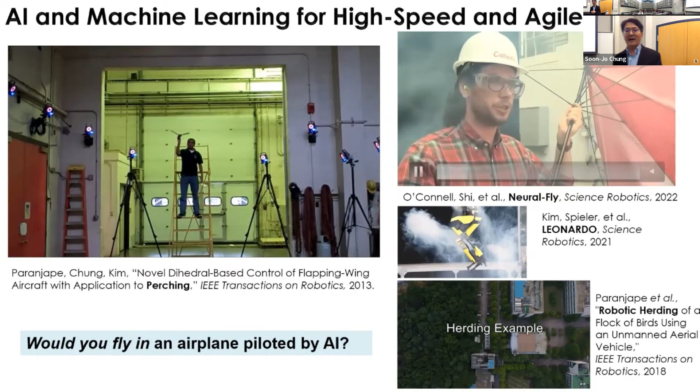So what kind of extreme environments am I thinking about? My former student, Guanya Shi, will soon join RI, the Robotics Institute, as faculty. This is Guanya's work with a micro-drone, and a Reuters TV video. Michael is having so much difficulty holding the umbrella—that's a mild gale type of wind, like 44 kilometers per hour. And we have a drone that can actually fight that kind of wind.

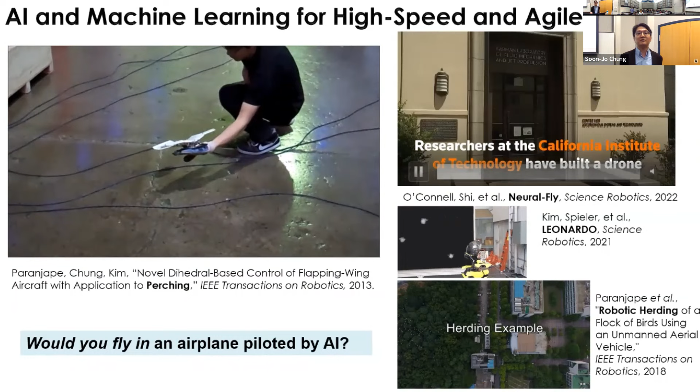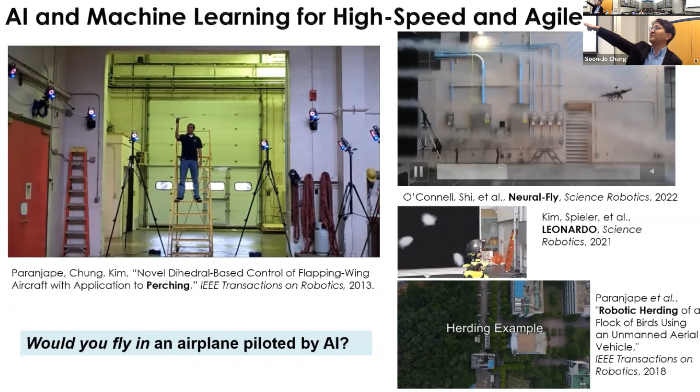It's called Neural-Fly, a machine learning based flight controller. Next to it, we demonstrated something with no machine learning: a perching maneuver using a bird-like robot. It's bird-like because you can move the left and right wing almost like flapping independently, so you can control the orientation of it, and then do pinpoint guidance. You can actually land and perch that glider robot on a human hand.

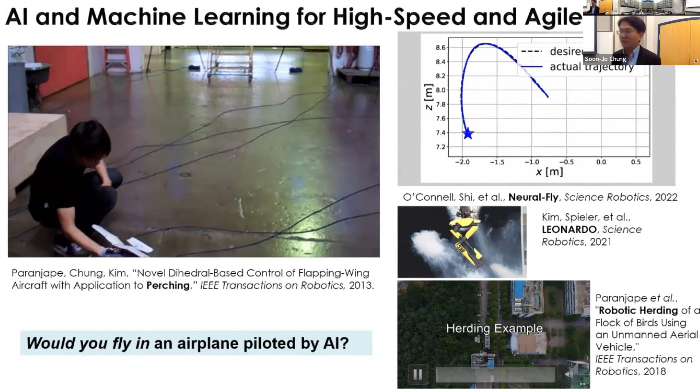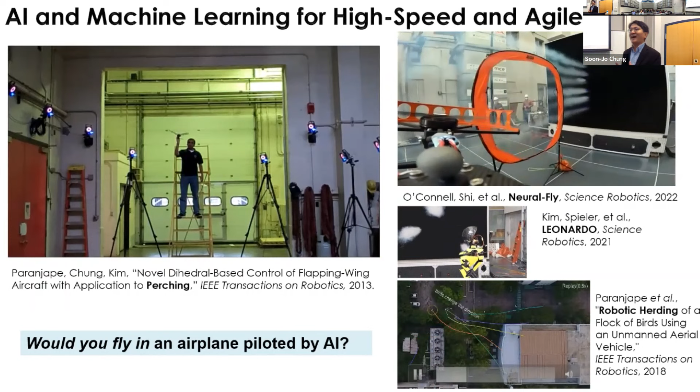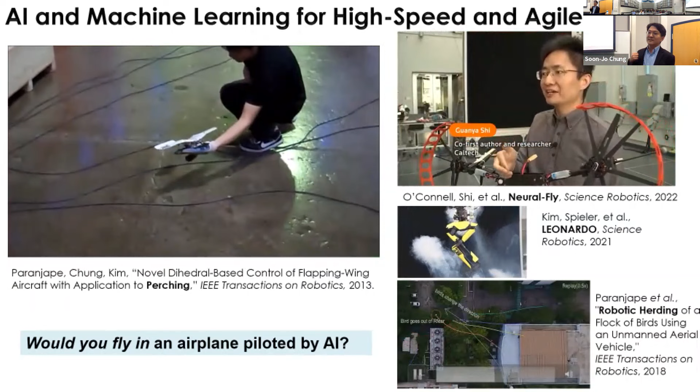Another example shown here is another video based on my prior work on swarm dynamics. I worked on swarm robots and swarm spacecraft, studying the flocking dynamics of birds and reverse-engineering that. This is the first ever demonstration of herding a live flock of live birds using a herding algorithm. These are examples of fast speed robots.

And if that's not fast enough, I'm going to mention another project for the Neural Rendezvous. We actually just submitted a paper, and I'm not going to go into detail, but essentially we developed a machine learning based approximation of some real-time model predictive control.

That way you have very resource-limited hardware on the spacecraft, because you really need radiation hardening for your spacecraft, so you probably don't have very fast computation.

So this is one example of using a neural network-based or machine learning-based method, essentially approximating the real-time computation needed for optimization using neural network approximation. Of course, that's much easier said than done, so you have to guarantee the stability and so on.

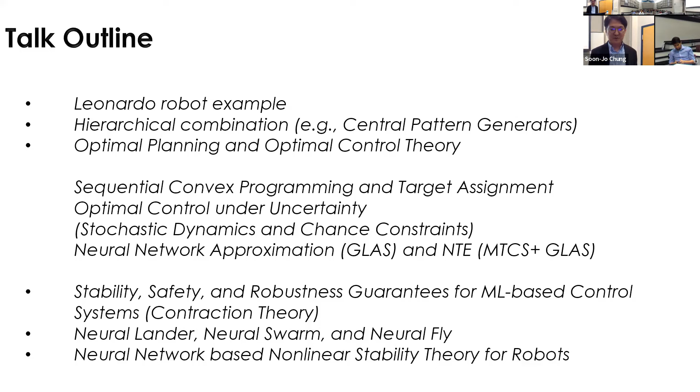So this is the main message for safety critical systems. I talked about high-speed spacecraft and drones dealing with huge uncertainty like unknown wind, because it's kind of independent of your state.

You have to deal with it.

So we have some approach of doing that. Now, the Leonardo robot - I have not used any machine learning here, but this was the first robot that bridged the gap between aerial locomotion, basically flying, and a walking bipedal robot. The idea is simple: you add propellers so they can actually stabilize the walking motion, and so you can occasionally fly.

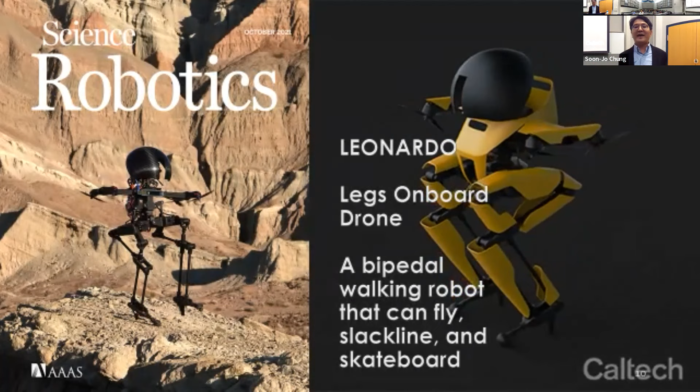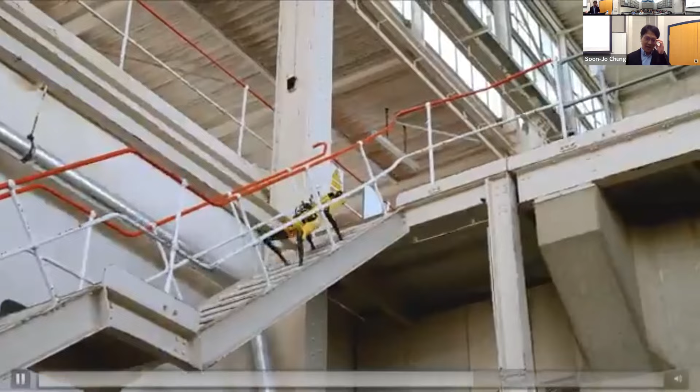The motivation for this is that I hear a lot about quadrupeds, and this is very impressive - they can go over loose rubbling terrain that bipedal robots cannot traverse. It has native obstacle avoidance, quadrupeds can do that easily, and can back up again. But why bother?

Look at our Leonardo robot. We start walking, find the stair, and I want to traverse that stair, and then boom, just fly over your obstacle. So that's the idea. Take a look at the certain posture, orientation of the leg and the whole body - you have to somehow synchronize these leg joints with the propellers. We have 4 propellers to stabilize the motion, and it also allows the Leo robot to fly.

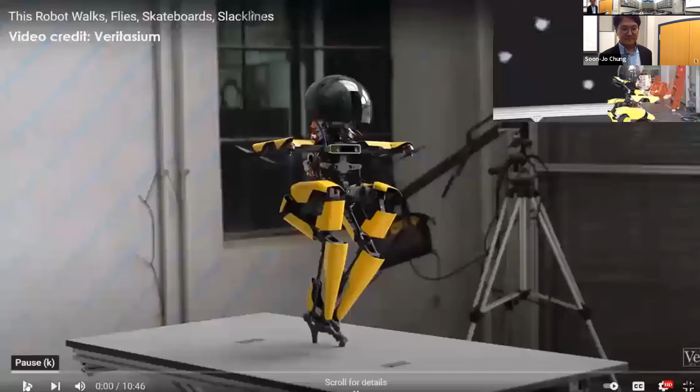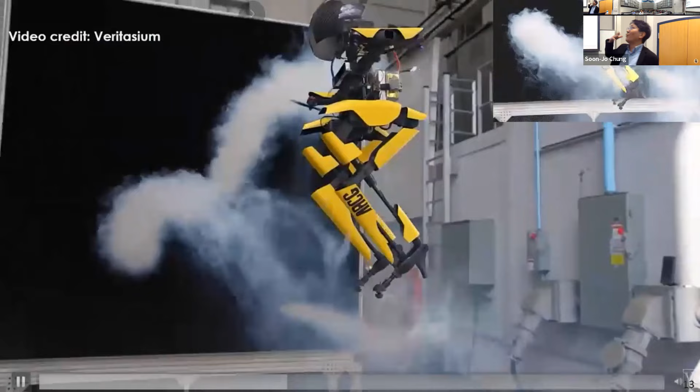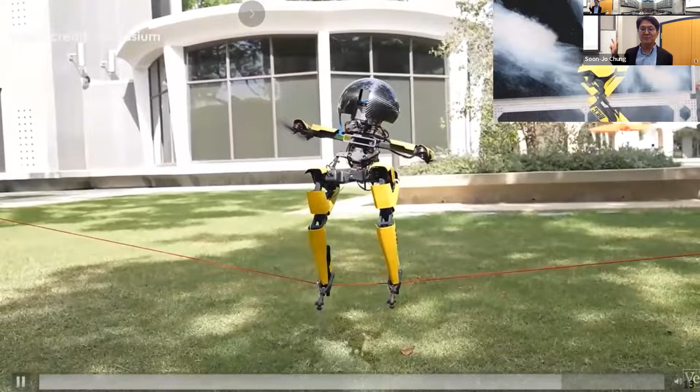Skateboarding - it's the first bipedal robot that can actually ride a skateboard, but obviously it's not a pure bipedal robot because we are using propellers. It's just showing the multimodal locomotion capability of the Leonardo robot, and most importantly, slacklining - it's like an inverted pendulum. The robot walks on a cable while stabilizing itself.

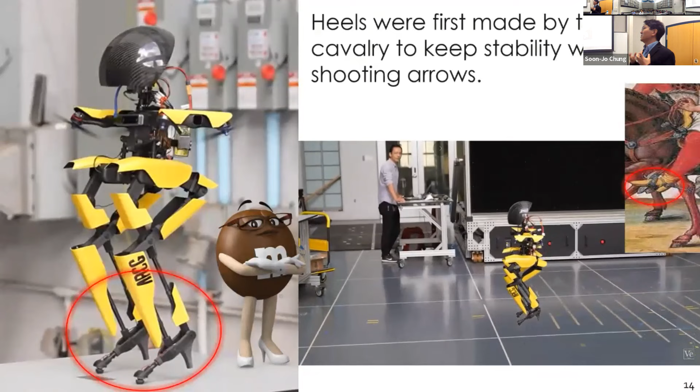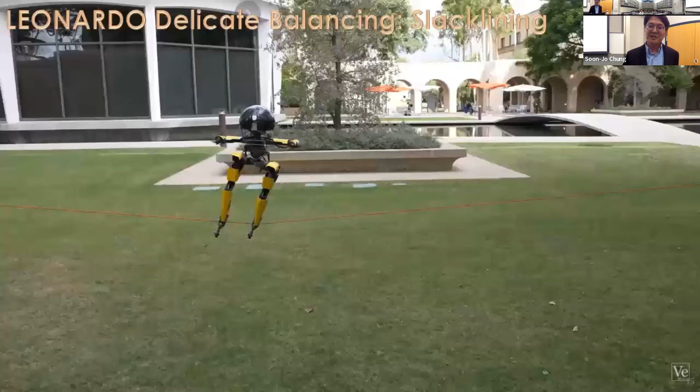Briefly, I want to say that this is probably the first bipedal robot with high heels. It was designed for the walking system, but eventually you can power down the motors so it can stand still without wasting any battery. That was one purpose - you can see that once it stops walking, it powers down and stands there. So it has some small design innovation, but the highlight, the challenging maneuver it can perform, is actually slacklining.

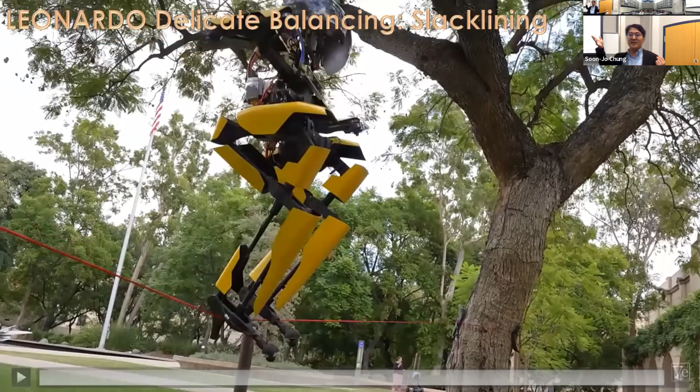And it's a famous Veritasium video - we got the Veritasium crew actually filming this robot. Even under this wide bouncing of a thin wire, it's clearly walking because the wire is supporting the weight. And we can show the beauty of the control system.

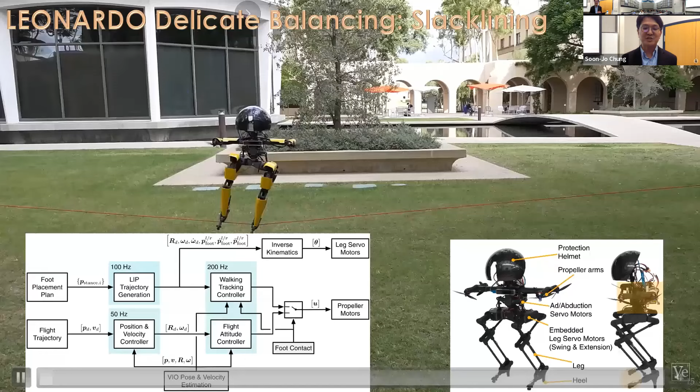We have a hierarchical control system - I'm going to mention a lot about hierarchical control systems. There's nothing new about hierarchical control systems, everyone uses that. For example, in a spacecraft you have a reaction wheel, a low-level motor control, all the way up to a higher-level attitude control, and even some planning. We have a separate walking and flying controller, seemingly integrated but running at different frequencies.

Of course, we cannot forget the Buzz Lightyear - but joking aside, we look at Iron Man. When you look at this Iron Man suit, you have these micro turbine engines strapped on the legs and arms. When this British inventor, Richard Browning, lands, he carefully synchronizes and controls the limb motion so they can control the thrust vectoring. We do something like that using Leonardo, using synchronized control.

So speaking of synchronized control, we can actually look at biological systems, and it's a very complex system.

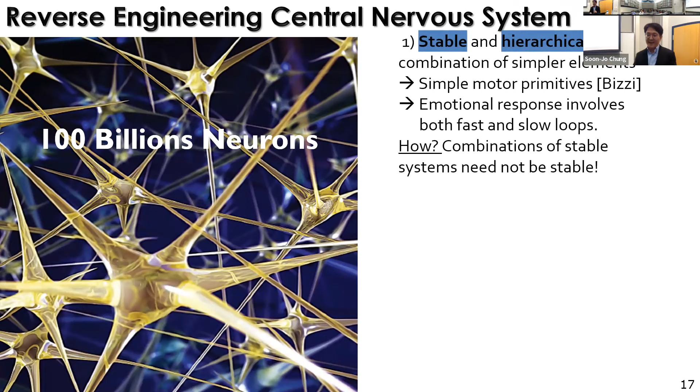Then when you talk about the biological central nervous system, we always talk about brains, for example, like the basal ganglia, which is responsible for reinforcement learning or supervised learning and so on. But the thing is that our human central nervous system is a very, very crude machine in terms of time delay. So how can you actually deal with this kind of time delay? Because we have a very crude muscle system and so on. Everyone knows this.

The central nervous system is composed of the brain, which can command high-level commands over your motors and muscles, and the spinal cord, which has basically a local loop that can deal with this kind of delay. So that's the key idea, hierarchical stabilization. And how are you going to achieve that using the robot?

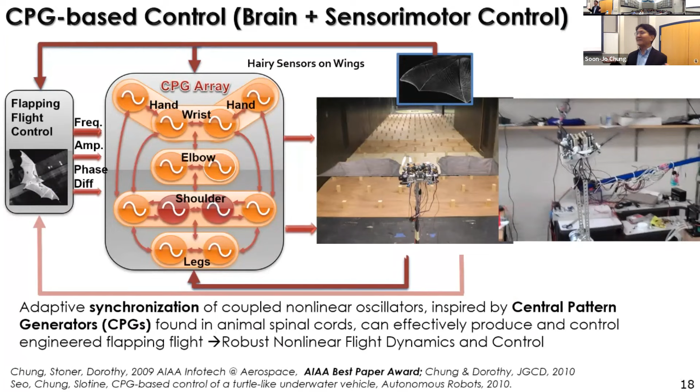So one example drawn from my prior work is that I worked on central pattern generator based limit cycle control, and I applied that to flapping flight. So basically the idea is that instead of commanding all these different joints of the flapping flight, bats have more than 40 joints on their wings. Instead of trying to command all these different oscillatory commands, you have a central pattern generator that can generate these rhythms, and then you can synchronize them.

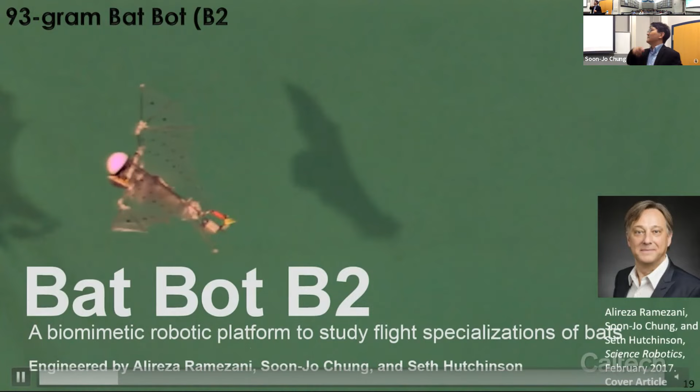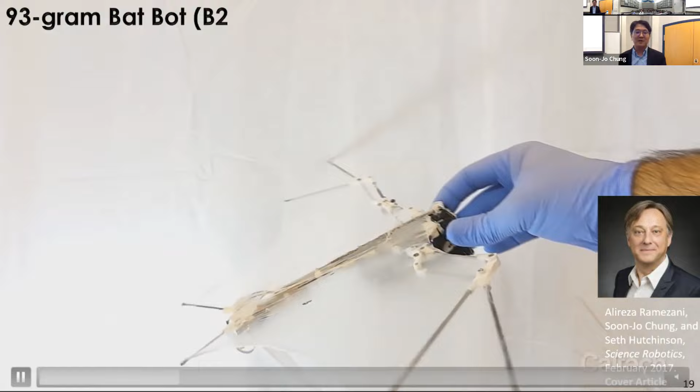And then instead of controlling individual signals, you can control the phase difference between different limit cycles. For limit cycles, we use Hopf oscillators that represent the limit cycle patterns, rotations of your flapping flight. And this is finally our attempt to demonstrate the motivation and what we can do with this flapping flight. So this is that famous Bat Bot I worked on with Professor Seth Hutchinson when I was in Illinois.

So again, I'm going to go into each block, motion planning and tracking control, to talk about some applications of machine learning based methods to, number one, maybe reduce the computational intensity of some of the optimization based methods, and number two, maybe deal with some very challenging unknown environments or models like wind-based disturbance. So again, this is a conventional reinforcement learning problem.

In fact, what I'm doing using more conventional optimal control methods can be viewed as reinforcement learning, but essentially the original form of reinforcement learning is basically optimal control, essentially dynamic programming: optimization over time steps. Typically that involves the dynamics, right? But reinforcement learning typically doesn't assume that you know the dynamics. You don't have a model. This is essentially a model-free version of dynamic programming.

So I'm going to talk about our physics-infused machine learning-based control method. Basically, you should not ignore your knowledge about the dynamics. You have to make use of it, try to identify what you don't really know, focus on that, and apply maybe machine learning methods. So speaking of that, we are going to start with a motion planning problem. Oftentimes you can formulate this as an optimal control problem. If you have a finite horizon and you keep updating it, that's an MPC. But you have to deal with the nonlinear dynamics.

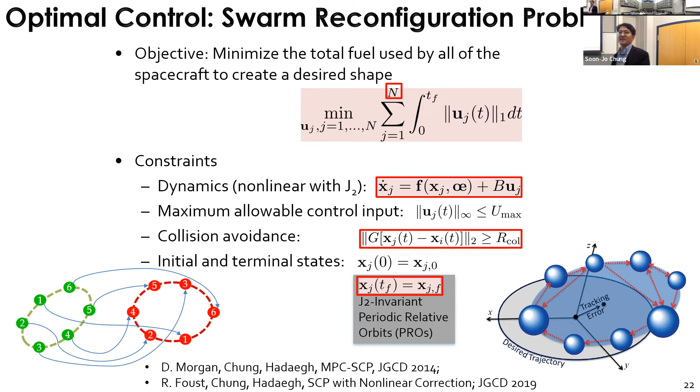And this is a spacecraft example, reconfiguring multiple spacecraft into a desired shape. Oftentimes you don't give the terminal point; the terminal point is not determined. And you have to deal with inequality constraints, and some of them are non-convex, like collision avoidance. So this is a pretty well-known method.

We have a series of steps to convexify the problem, because nobody can solve the exact optimal control solution to that original problem. You are doing a series of approximations, like decentralizing the cost function and convexifying the non-convex collision avoidance constraint by drawing hyperplanes. But then you are also doing successive linearization. I think this is still better than one-time linearization, because you are doing iterative sequential convex programming so that you can further improve the linearization.

We published this work, first applying it to multi-agent coordination dealing with highly nonlinear dynamics, and this is very popular these days. But in the International Journal of Robotics Research paper, we combined that with high-level planning. What is that? Basically, I give the command: four green robots, from whatever initial condition, why don't you make this particular shape, for example, a rectangular shape. So I don't specify robot 1 goes to this point, robot 2 goes to that point.

It automatically figures that out using some target assignment algorithm or terminal polynomial algorithm. We have used the Hungarian method before, but in this paper we are using the distributed auction by Professor Bertsekas, and that's inherently distributed.

So we're having these two loops simultaneously running, and this can be viewed as another hierarchical loop: running some decision-making slow loop, then a trajectory optimization faster loop, and feedback control is going to be even faster. So when you have these multiple loops combined in some sophisticated system, you have to make sure that the combination of these different loops and time scales actually leads to a still stable, convergent system.

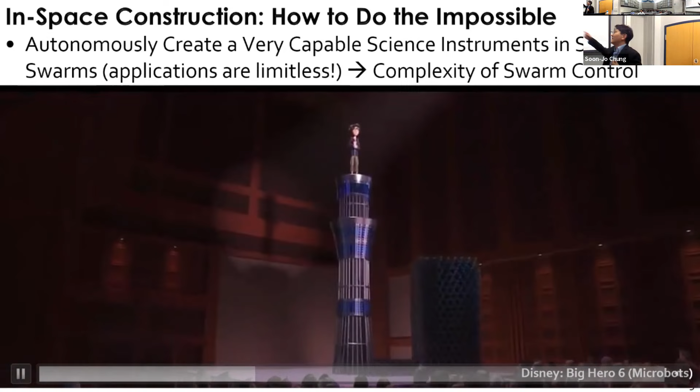Further extending that, my dream is building something like a microbot, and your department has a strong connection to this movie, but essentially a typical microbot can now be accomplished by one person. Command: why don't you make this kind of shape, and it can automatically figure out the desired location, doing collision avoidance maneuvers and trajectory optimization. So that's part of my research.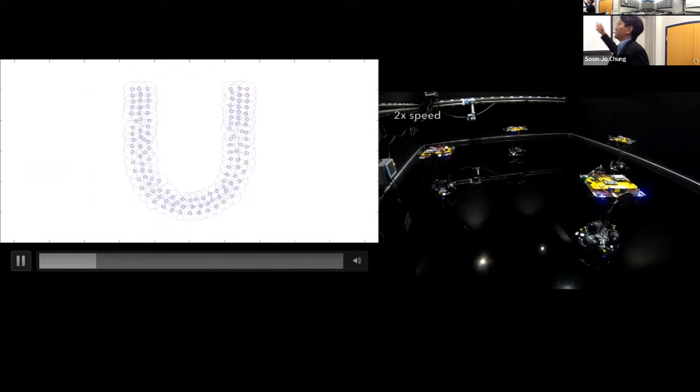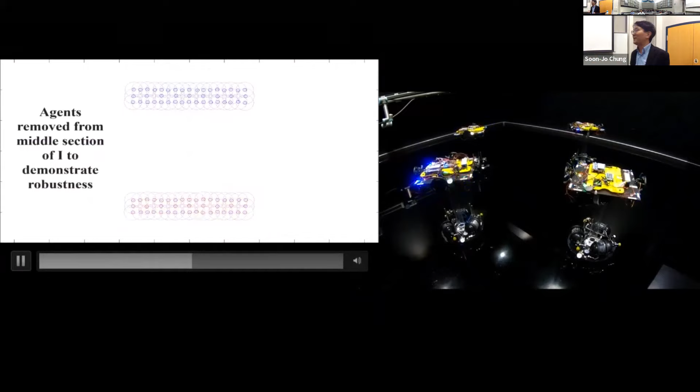Swarm control. We run the previous algorithm of sequential convex programming combined with the distributed auction algorithm called SATO. I give a desired command, why don't you make a UIUC, and then it can automatically configure that. And if a swarm of spacecraft is hit by an asteroid like this, you lose certain agents, and then you can redistribute them using this simultaneous optimization with the SATO algorithm.

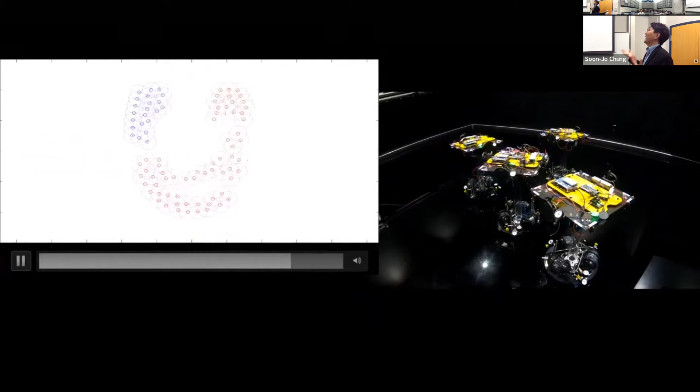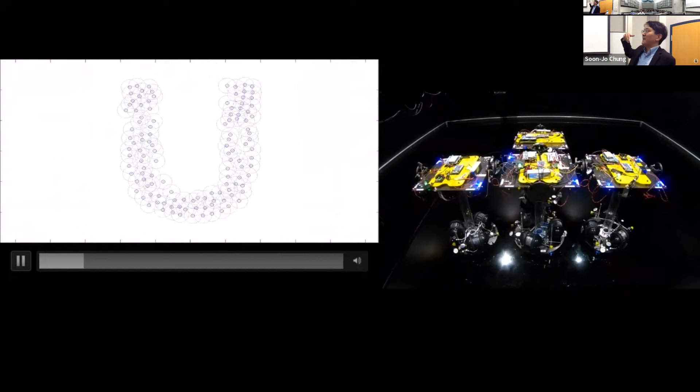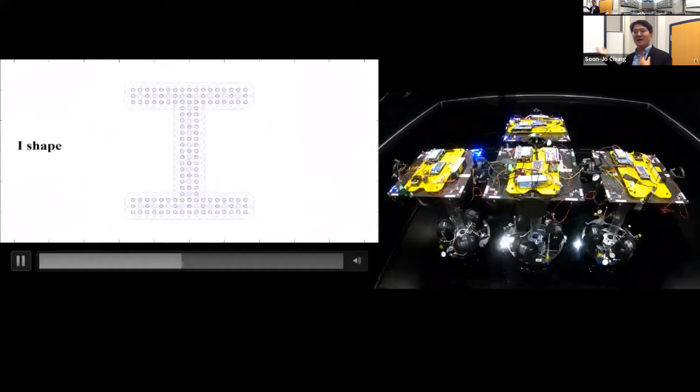It can actually do that. And obviously we are demonstrating that using autonomous docking on our spacecraft simulator facility. And eventually, I don't command where spacecraft one goes. I just make a command: why don't you make an upside down T shape? And it can automatically figure out the optimal collision-free path and makes the collision, which is docking, only at the terminal time step. So that's kind of an implementation of this algorithm.

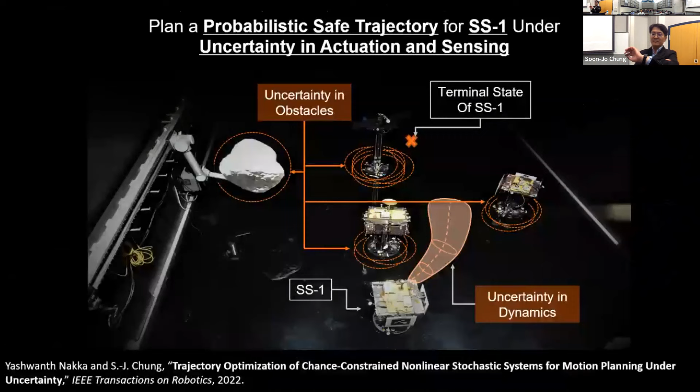But this is prior work, basically published in 2014 and 2016. What's the new extension? What if you have a stochastic uncertainty, right?

I don't know why it's starting that. It's automatically starting. Well, okay.

So what if your dynamics are stochastic in the sense that it's nonlinear, but you have a stochastic noise? It's actually a stochastic differential equation.

I don't know why it's actually starting automatically. Maybe I'm going to speed up.

So one idea is, going back to this, now we replace the dynamics with the nonlinear dynamics perturbed by noise. And number two, inequality constraints, because that's a challenge. One problem of the HJB approach is that, yes, you can maybe deal with the equality constraint, like you want to go to that target and you can modify the cost function. But how do you deal with inequality constraints, like collision avoidance and input constraints and so on? And so that's what we are dealing with.

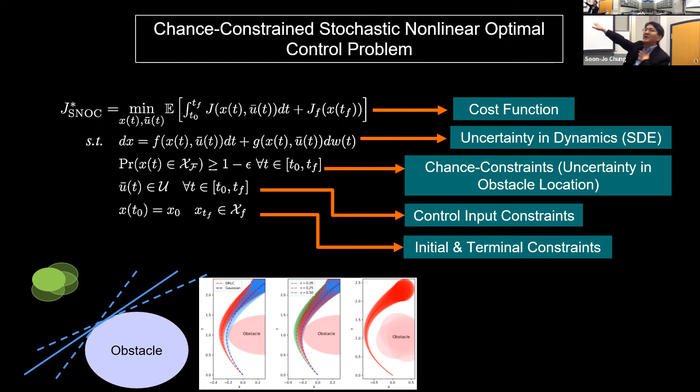You can easily deal with it, although we are doing kind of a suboptimal approximation. But we are dealing with a multi-agent system, which is very complex. In addition, we have this probability of a certain constraint that should be greater than 1 minus epsilon, where epsilon is kind of a risk measure. So this is called chance constraints. It's basically probabilistic. So the idea is that you have a certain way of converting that stochastic differential equation to a deterministic differential equation, and you have to modify the chance constraints as well.

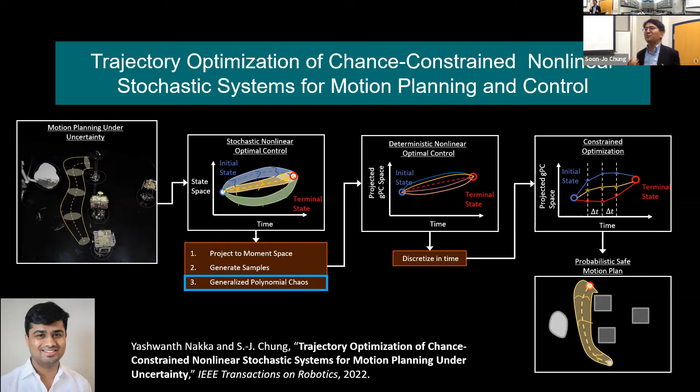Again, what we are doing here is multi-agent, including single agent, trajectory optimization, but in the presence of uncertainties, both in the dynamics and also chance constraints. One preferred way of doing this, we just published this in Transactions on Robotics, is that we took the generalized polynomial chaos approach. If you are familiar with structural dynamics and FEM, it's almost like a Galerkin projection.

So you have this coefficient x_ij for this polynomial expansion, and z is the random variable, a normal distribution with zero mean and unit variance. And we can turn that into deterministic dynamics of x_ij, and the error between the two, the stochastic SDE and the deterministic one, goes to zero as you increase the number of polynomials to infinity, of course. And now it becomes a deterministic problem.

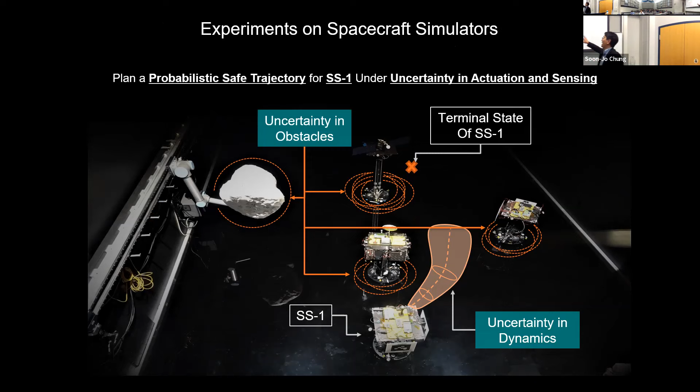One example scenario is that I have multiple agents. You have to avoid collisions. And compared to the non-stochastic version of the algorithm, in the presence of uncertainty in the obstacle location, including the neighbors' locations, we can see that the boxes have shifted a little bit. We can find a probabilistically safe path. So that's another way of extending this numerical solution to the trajectory optimal control problem. And it's going to be very difficult to solve that problem using conventional reinforcement learning.

Going back to this diagram, I don't know why it's changing the slide automatically, but I'm going to move on to the machine learning based approximation of sequential convex programming that's solving trajectory optimization of many agents. One example is GLAS. I'm very proud of this work. I don't know how well known this work is. It got an honorable mention best paper award from IEEE.

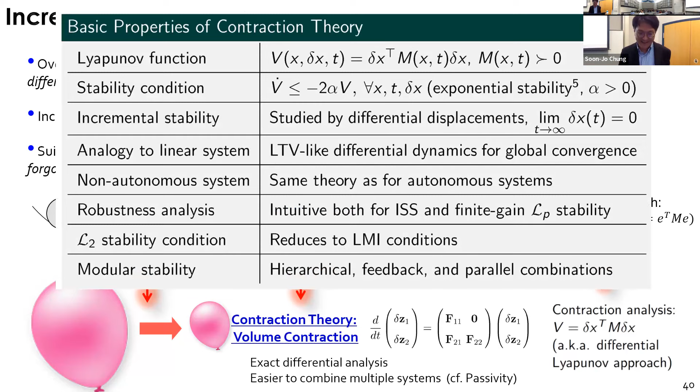You can see that from this kind of space system, but now with a virtual displacement vector delta. So what is delta? You have an original dynamics closed loop. X is non-autonomous - you have a dependency on both state and t - and it's very straightforward. It kind of resembles a nonlinear Riccati equation of some sort. But you can see that you can actually construct the differential dynamics of your virtual vector displacement, delta x. That's an infinitesimal delta. You can easily find this in the calculus of variations if you are doing optimal control theory.

So if delta x goes to 0, then the distance between any trajectories from the single dynamics, because you can start from any different initial conditions, but no matter what, regardless of those initial conditions, all these different solution trajectories will converge to a single trajectory.

That's very beneficial because a lot of the systems you're dealing with are not about stability about a point. Although you can convert the error state vector, and show that the error is converging to 0. Same thing as tracking something. These are trajectories with a tracking error of 0.

But here you have one trajectory and a second trajectory. You want to converge them. You have to have them converge to each other. So that's the incremental stability theory about multiple trajectories.

And that's very useful for our learning-based systems or robot systems, because everything is a trajectory, not a point. So taking an example of a machine learning system, we just published this in Annual Reviews in Control as a tutorial paper. It's actually quite straightforward.

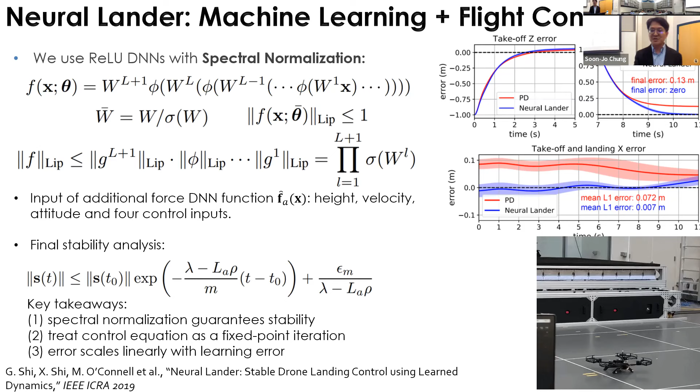And it can do something like this. It can track. It can go over the table.

So one example benefit of spectral normalization is that you can go outside your training domain. That's typically the problem of any neural network-based method. You can see that when you do spectral normalization, when you go outside your training domain, you have continuity in terms of response, so it's more predictable. If you don't have spectral normalization, you just jump randomly, which is not really reliable. I don't want to use this method.

So that's like the right-hand column. Obviously, spectral normalization has this kind of regularization, like a smooth property, that ensures this kind of performance. And for this table problem, all of a sudden, once you go over the table, you're experiencing the aerodynamic disturbance. You can see that with spectral normalization, you can better predict the table shape. That's one example of why spectral normalization works better.

So again, what I'm trying to convey here is that if you wanted to do completely end-to-end learning of this neural lander, like a drone landing in the presence of a ground effect disturbance, it's probably going to take a lot of time, and probably without guaranteed stability.

So this is a more principled way of doing machine learning-based control, in my opinion.

We apply that to swarm interaction, because when you're talking about ground effect, like air blowing on each other, you can actually destabilize your swarms of drones when they're flying in close proximity. So we have this heterogeneous set of drones, actual Crazyflies, and this is a record of how closely they are flying, because we are using neural-swarm to counteract or cancel the aerodynamic interaction between the agents.

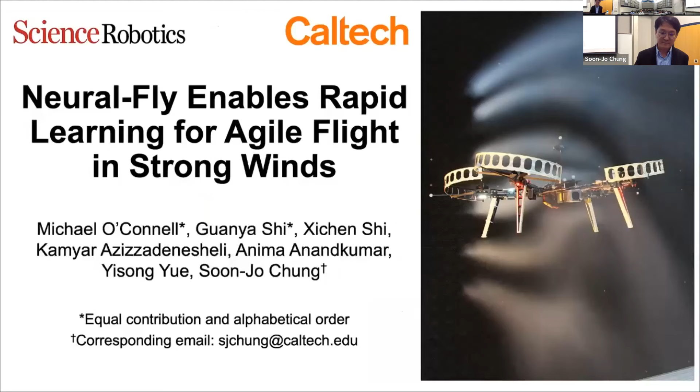I'm going to skip the video.

Basically, we are using adaptive control. Adaptive control is known for handling parameter uncertainty — you can adapt to it. So the key idea is using adaptive control as a way to rapidly adapt a certain part of the neural network. What is that?

You have a multi-layer deep neural network. For the last layer, if you do some mathematical manipulation, you can see that the last layer coefficients — whatever weights you have there — can be written as a linear function of this form, where A is not a function of your state, but a function of some wind-based parameter that you don't know. It's state independent — not a function of velocity, position, or orientation of your spacecraft or aircraft. So this is neural fly.

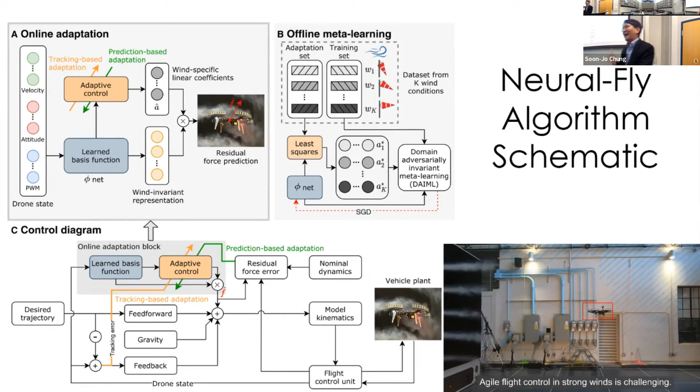You have a meta-learning method that can precondition your deep neural network so that the last layer can be adapted quickly and efficiently using the neural network. Then you combine them. So this is the way to train the neural network.

We have an adversarial cost function here, which means you do a conventional least-squares fit to better approximate your wind-based disturbance, while making sure that the last layer is independent of your state. Whatever wind-based disturbance exists is only captured in A, and that's what we update in real time. So we're not doing a full real-time retraining of the whole neural network — this method works because you train the network so that the last layer weight A is very sensitive to whatever time-varying disturbance, like wind, occurs.

This is a bit of contraction theory and adaptive control. We are doing composite adaptation, originally popularized by my former PhD advisor, Slotine. We rediscovered it because you have a conventional tracking error-based adaptive control approach used in this community, but also a least-squares, almost Kalman-filter based approach. So you combine them, and the idea is how you prove the stability.

This is a kind of conventional problem. You have a very nice hierarchical combination, and you can basically prove the stability under certain assumptions, like bounded certain errors and so on. Then you can find what parameters you have to tune. So this is a more interpretable way of looking at machine learning based control.

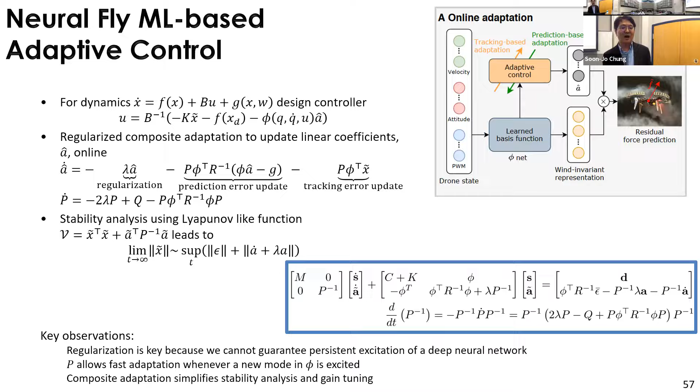This doesn't solve every single problem. If you apply that to a different dynamics like quadruped dynamics, it's not going to work. You have to maybe retune and readjust how adaptive control works in conjunction with your neural network based approximation of something. So that's the final result of neural fly compared to other state-of-the-art tracking control methods.

It reduces the tracking error when following an agile trajectory in the presence of time-varying winds, even when we're blowing wind up to 44 kilometers per hour. This is a comparison with other tracking control methods, including aerodynamic control. You can see that even if we slightly change the model of the drone from your trained model, it still outperforms the existing control method.

We trained the neural network only up to 6.6 meters per second. So when we do testing, we actually blow the wind at much higher speed, at least twice as fast.

Now I talked about stability, but let's switch gears for the final chapter of our proposed method of leveraging machine learning for control. I talked about proving the stability, so you find the contraction function. If you're using contraction theory, that's kind of limited to finding this M metric function.

In contraction theory, your contraction function is always a quadratic function of delta x, the virtual displacement. What is delta x again? That's an infinitesimal displacement, and you integrate that—it's almost like a path length integral. So the trajectories, the distance between multiple solution trajectories of your nonlinear dynamics, potentially stochastic nonlinear dynamics, can be converging to each other, to a single trajectory.

So finding the contraction function boils down to finding this positive Riemannian metric, positive matrix M, or its inverse W. We found a nice way of doing that using a neural network, because typically you'll see lots of papers finding a contraction function using an existing method called sum of squares. But this actually worked better than sum of squares because it can handle higher dimensional systems.

And then we are using spectral normalization—otherwise it's not going to work. This is the importance of spectral normalization: you regularize your neural network whenever you do training so that you can have a bounded slope of your neural network.

We are using a neural network approximation of a contraction stability function when you design your controller. You sample multiple trajectories and compute an optimal positive definite function used for contraction theory, then you train the neural network. You can use that for control design and motion planning, and it's still better.

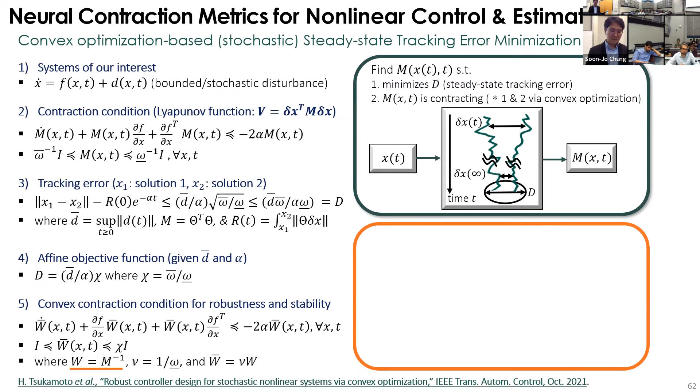Yes. So on slide 59, where you were comparing your algorithm with the L1 adaptive and other method, I noticed that the tracking error decreased with increase in the speed of the wind for one of those. No, that's not our results. That's their results. Ours keeps increasing, but is still better than their method. I was just curious if you have any thoughts on why tracking error would decrease with increased disturbance? I think it has to do with the low pass filter, and by the way,

I think we use the same computer, but typically their method in their published paper uses a lot faster computation. We are only updating the control input at 50 Hz, so it's much slower. Still, it worked very well.

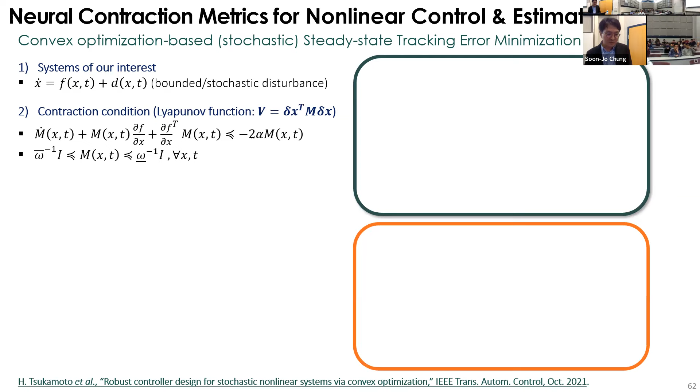To answer your question, I have to maybe, do you know how to actually go back? I have to do this. Yeah.

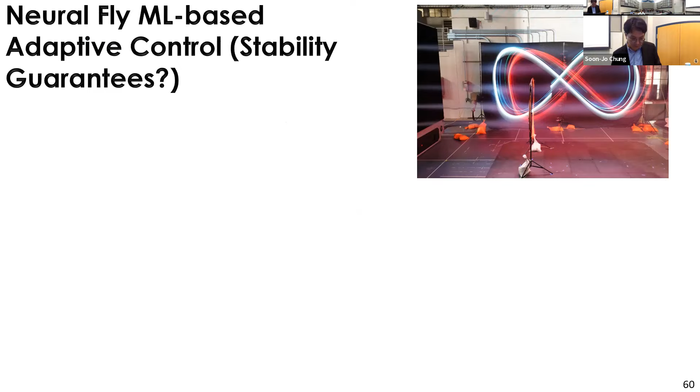Oh, yeah, exactly. I'll take one if no one else wants to.

So I'm curious, the sort of learning the contraction metric stuff. Have you thought about connections between this sort of thing and actor-critic methods where you learn a value function approximation, connections to the value functions or the Q functions, and the connections to what the more traditional RL community is doing?

Maybe, because when you actually prove the convergence of a certain kind of quadratic function, you can view that as a cost or reward function. Oftentimes in the machine learning community and the control community, we're obsessed with the LQR cost function, a quadratic cost function of the state and a quadratic cost function of U. Essentially, this is proving the convergence of that cost exponentially, which may be too stringent for that kind of problem, because what you need to have is just a decreasing cost.

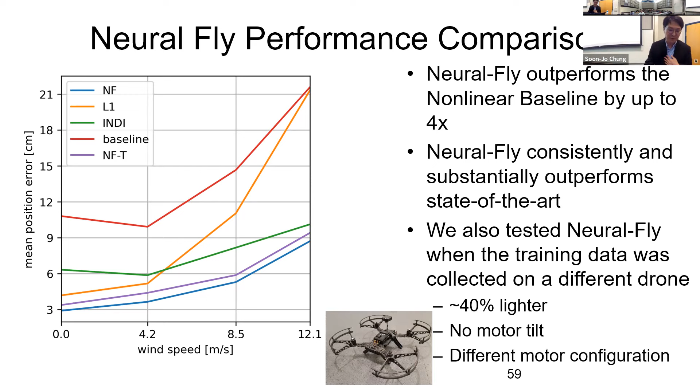So one other thing along these lines: with these methods, you still have to compute a geodesic under that metric online, right? No. The geodesic is actually approximated. Basically you have a V and then you integrate that. You can see that the square root of that infimum, the minimum geodesic, will be an upper bound of this mean square that we have shown you before. I don't have the visuals here, but they are clearly related. What I mean by that is that you actually compute this error bound.

I have to go back to the contraction theory. Your error bound is mean squared error, but then you can compute how that's related to the square root of the shortest path integral, which is the minimizing geodesic. Yeah. You don't have to compute that, because in our stochastic version we are using that as an analog of our mean squared error distance, but eventually what you care about is the mean squared error. They are upper bounded or lower bounded by each other, so they are related. But you don't have to compute it, and you can get to the upper bound here.

Very online. Anybody else? I think everyone wants to go to snack.

So how did you find the control structure where you separated out the basis function, the main parameters, and the last layer of the network? How was that found? So maybe I don't understand your question, but maybe it's a complicated question. You're talking about non-affine control input? Yeah, basically separate out the U and multiply it. Same thing like you wrote the main parameters multiplied with something. So that was the general model.